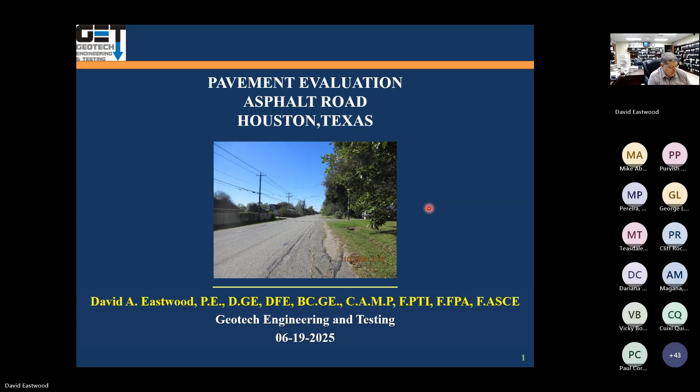Interesting project that we worked on. We got about 170 people RSVP'd on this thing. We have a lot of engineers, city engineer, county engineers, civil engineers, transportation engineers that are listening in, developers.

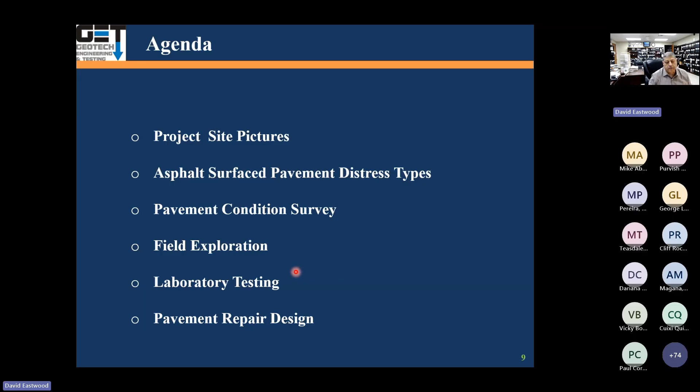Here's the two-lane asphalt road. Actually, subject to a lot of development going out there. So there's a lot of residential development. So there's some distress in some of these pavements, a lot of cracking and potholes.

A lot of edge cracking, and you see a lot of the asphalt pavements around the Houston area, they have this edge cracking because of presence of the open ditch and trees. Both the trees and open ditch take a lot of moisture, evaporation, and of course the trees suck the moisture, and as they do that, a distance from the edge of the pavement of about 9 feet, that's the area that usually the open ditch causes problems, and you're going to see these cracks, and they don't go away.

And so you can go out there and repave it, but it shows back up again. You can put overlay on it; it will still show up. And so to treat it, you're going to have to do curb and gutter, or go concrete paving, or you can do what's called chemical injection all the way down to a depth of 10 feet. Or remove the expansive soils, replace with non-expansive soils, but that still is going to cause problems because of the moisture removal due to the presence of the open ditch.

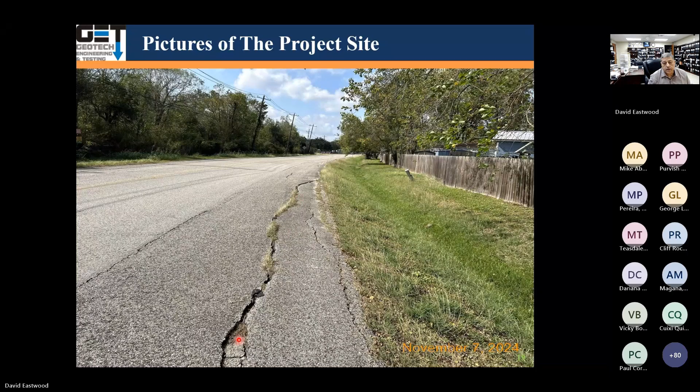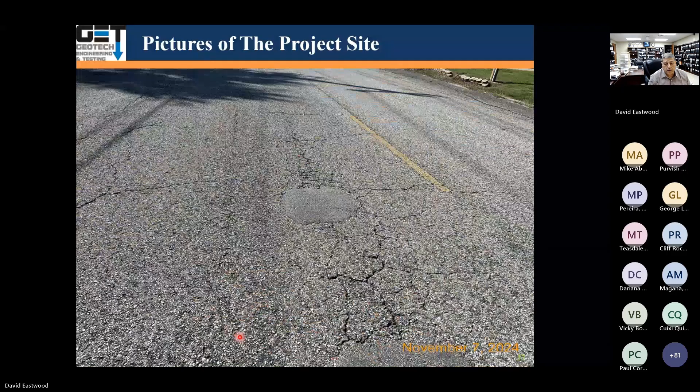Again, more cracks. Again, a lot of edge cracking. So you can see all these different types of distress on the pavement structure. The potholes that had been backfilled. So it was not in the best condition, because of the high traffic loading.

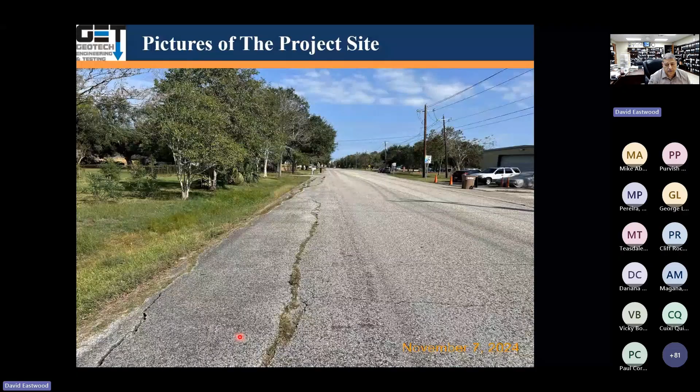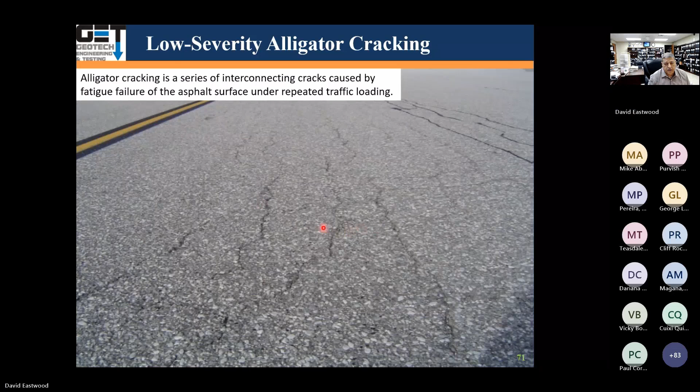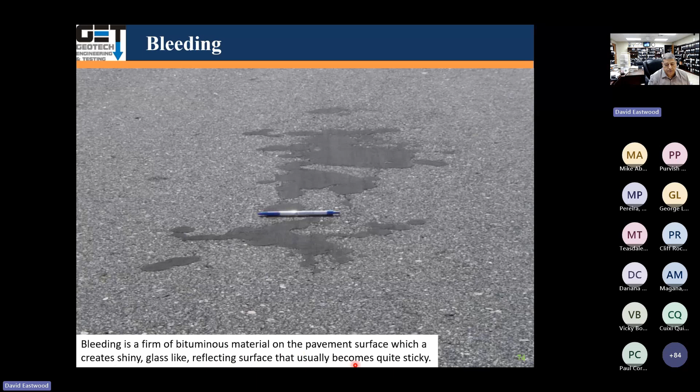Bleeding. Bleeding is basically a film of asphalt material on the pavement surface, which creates a shiny, glassy, reflecting surface that usually becomes quite sticky. And it's caused by excessive asphalt cement or tars in the mix of the asphalt.

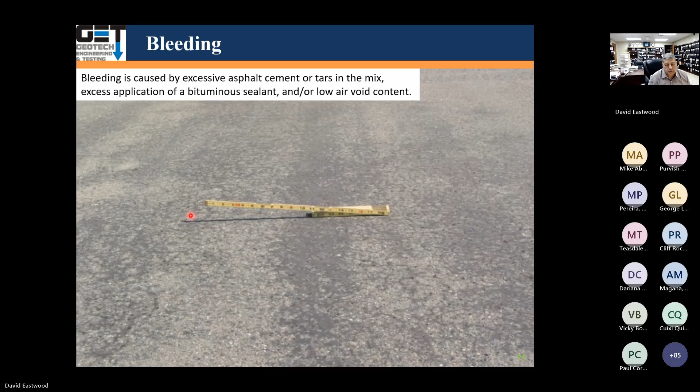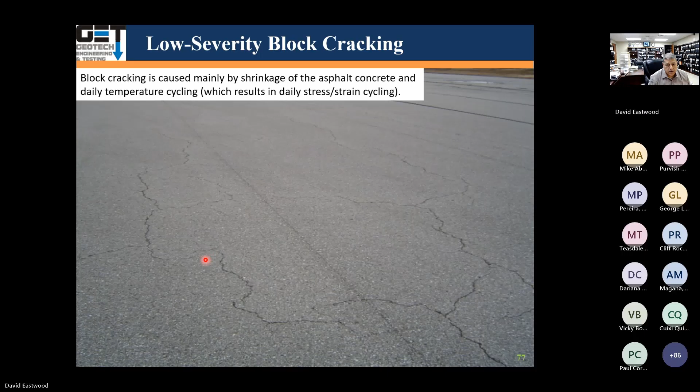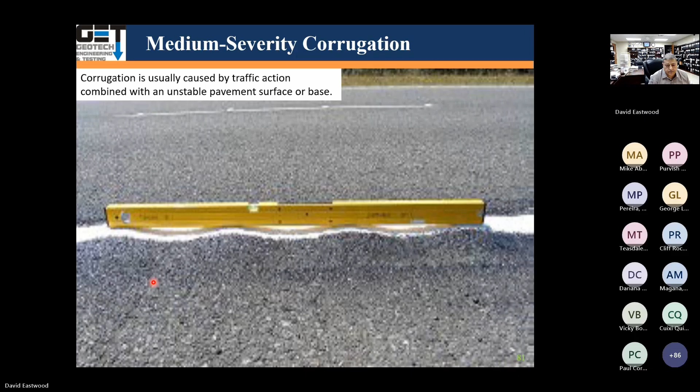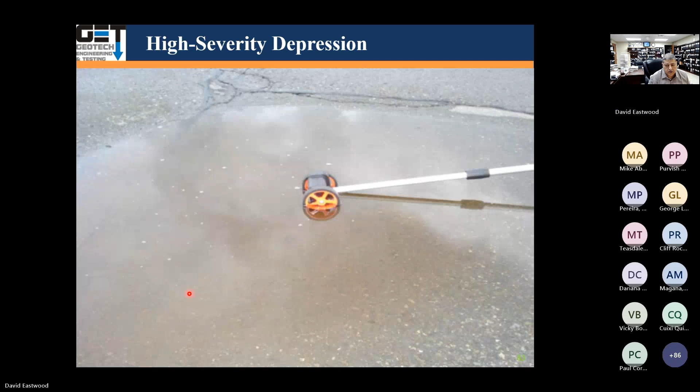We see a lot of depression in the pavements, localized pavement surface with elevations lower than the area around it, called depressions. See the depression here? Here's a big one.

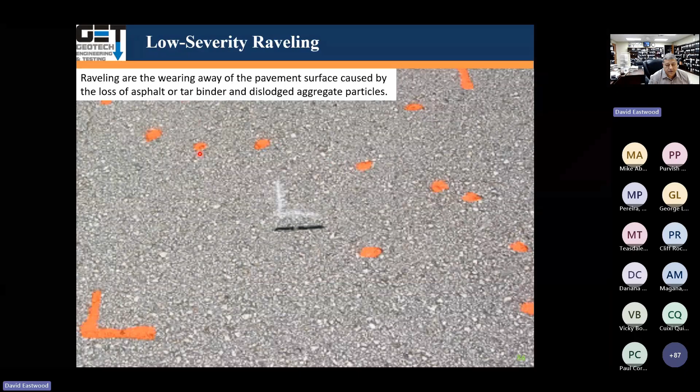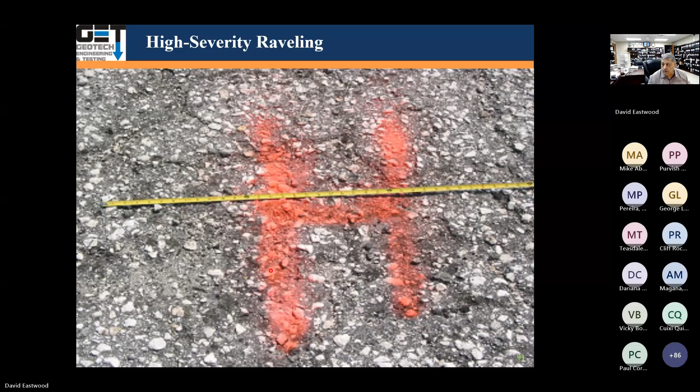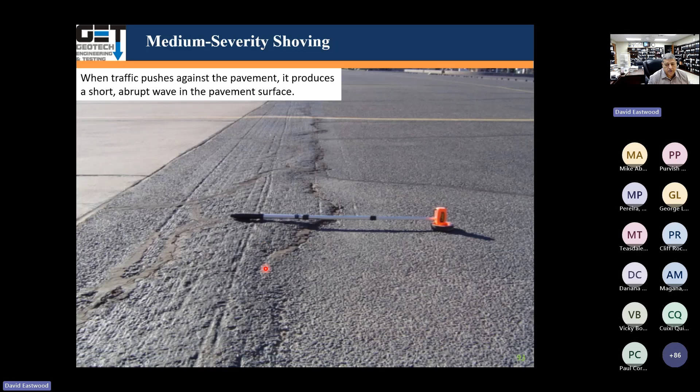Here we've got shoving. It's basically a permanent longitudinal displacement of a localized area of pavement surface caused by traffic loading. This is the shoving here, right there. When the traffic pushes against the pavement, it produces a short, abrupt wave of the pavement surface. It's called shoving. Shoving normally occurs on unstable liquid asphalt pavements.

Pavement condition survey. One of the things we did on this project was go out and do a pavement condition survey, developed by U.S. Army Technical Manual 5-623. It's a manual that goes through the procedure. Essentially, you look at all the cracks, depressions, and pavement distress, and based on that you rate that pavement. If your number is 0 to 10, your pavement has failed.

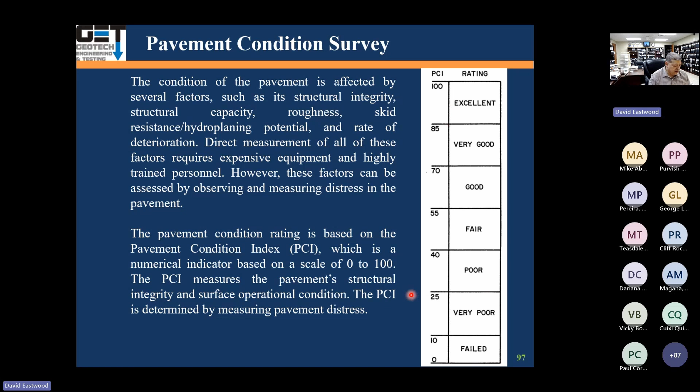Between 10 and 25 is very poor. Between 25 and 40 is poor. Between 40 and 55 is fair. Between 55 and 70 is good. 70 to 85 is very good. Above 85 is excellent. They call it the pavement condition index. I see it all over the place.

Basically, you look at the pavement structure on the road and divide it into sections. In this case, we broke that pavement into 7 sections, and we evaluated the PCI, pavement condition index, at each of the 7 sections.

When you go through it, there's a form that the U.S. Army has, and based on the distress type you go through it. For example, in this case, this is an example of a section on this project, about 1,000 feet long and 32 feet wide, about 32,000 square feet. Here is 3 types of the distress, block cracking that we have.

We had in this 1,000 feet an 8 foot by 17 foot area of low intensity severity block cracking. Then here is joint reflection cracking. In this area we had medium severity joint reflection cracking over 1,000 feet.

In this column we have type 1 alligator cracking. In this 1,000 by 32 foot section, we had 4 by 43, 6 by 40, 6 by 33, and 4 by 13, all low severity alligator cracking.

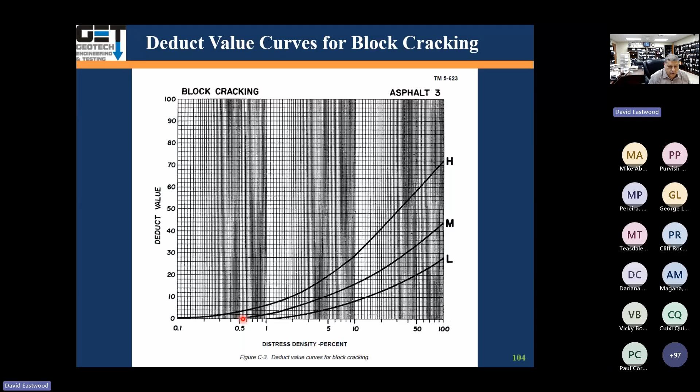You got all these different densities for different types. Number 3 is block cracking with density 0.43. So you go to block cracking at 0.43, which was medium, but it was almost 0, so the deduct value is 0.

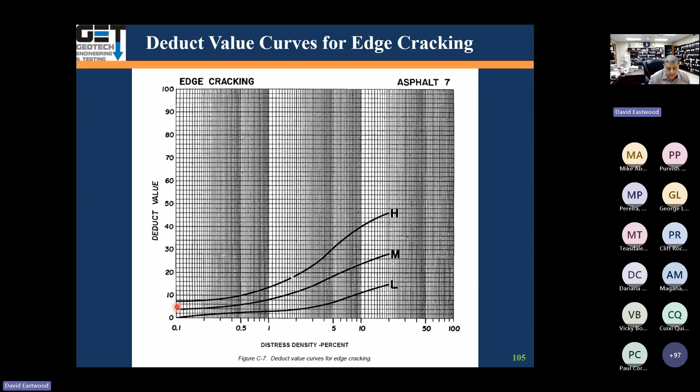You go to distress type number 7, edge cracking. One of them was medium at 0.22. So you go to edge cracking 0.22, which was medium, and you should get somewhere around 5 or so for medium. Going back here for medium, you get 4.

You go through each one of these distress value areas, add them all up, and get a total deduct value of 67. After that, there's what's called a corrected deduct value, CDV. You have to make a correction on these numbers. The way you do it is, after going through these charts, you look at the total deduct value, and the number of entries with deduct values over 5 points, then you get the corrected deduct value.

This is the actual chart. Going back again, our total deduct value was 67, and the number of values higher than 5 was 3. So you have 67 and 3 values greater than 5. Q is the number of deducts greater than 5 points. So you go over here and you get roughly 45 for the corrected deduct value.

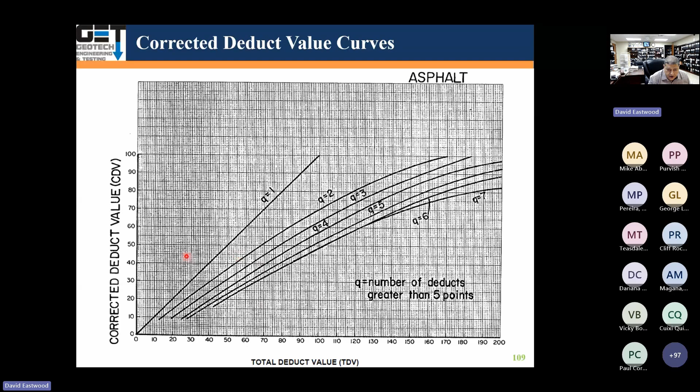Corrected deduct value, so that's roughly 45. Actually it's 42, so we got a corrected value of 42. You subtract that from 100 and you get 58. That's your pavement condition index, which is considered good. So for this 1,000 feet by 32 feet section, the overall rating indicates the pavement is in good condition.

So we basically took that pavement and put it into 7 segments. Here's another segment, 1,000 feet by 22 feet. We went through all the cracking and density calculations and got a corrected deduct value of 51. Subtracting that from 100 gives 49, meaning this segment has a rating of fair.

The next one is a 31 foot by 1,000 foot segment. We got a PCI of 56, which means this section has a rating of good. Here's another one, a segment 34 feet by 1,000 feet. Your PCI is 55, which means fair.

Here's another segment, 5,000 feet by 34 feet, and we got a PCI of 48, which was fair quality. Here's another one, 28 foot wide by 500 foot long, and we got a rating of 68, meaning the pavement is in good condition. The last segment, 24 foot by 290 foot long, had a rating of 80, which is very good condition for that pavement.

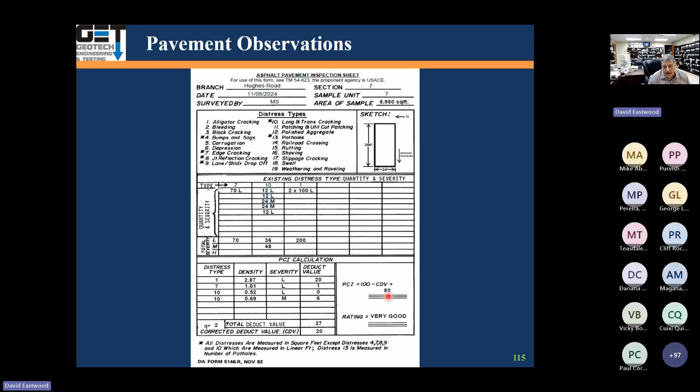So using the pavement rating system, we got results ranging between 48 and 80. So our pavement basically performed from fair to very good. But that's for the existing condition of the pavements. It doesn't account for future traffic loading. So your PCI may be good, but if the traffic load on your pavement is going to increase over time, the PCI assessment doesn't capture that.

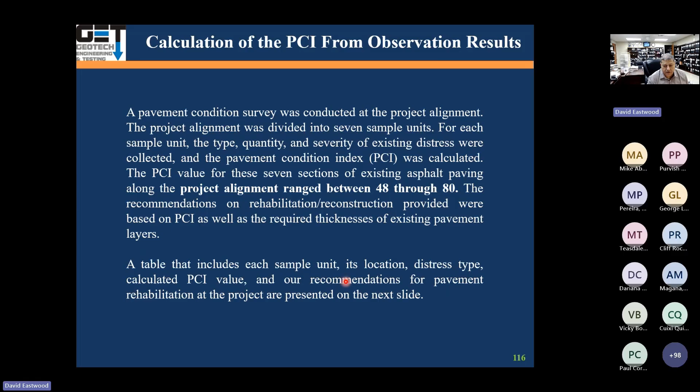In summary: Segment 1 had a bunch of alligator cracking, block cracking, and edge cracking, with a rating of 58, which was good. Segment 2 had alligator cracking, edge cracking, joint reflective cracking, and longitudinal and transverse cracking, which was fair. Segment 3 was 56, good. Segment 4 was 55, good. Segment 5 was 48, which is fair. Segment 6 was 68, good. Segment 7 had less alligator cracking, edge cracking, and longitudinal/transverse cracking, and the PCI was 80, which was very good condition.

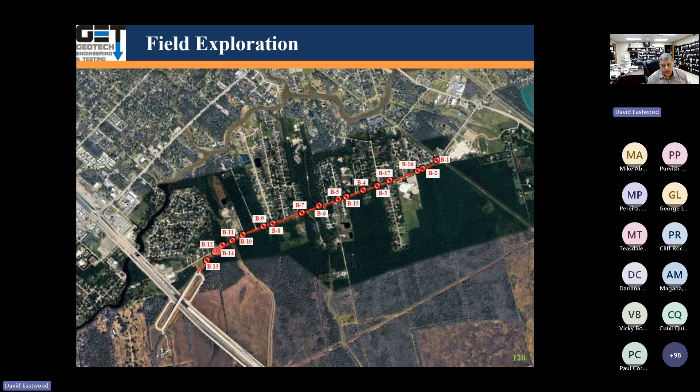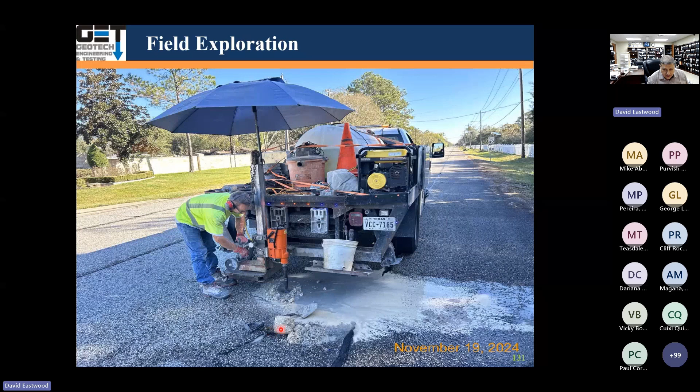Here's another coring. Again, we're coring in here. We see the asphalt pavement and the base, crushed limestone. Again, looking at the cores, you've got asphalt pavement, base, and stabilized subgrade. We cored the stabilized subgrade as well, so you can see the asphalt, the base course, and the stabilized subgrade.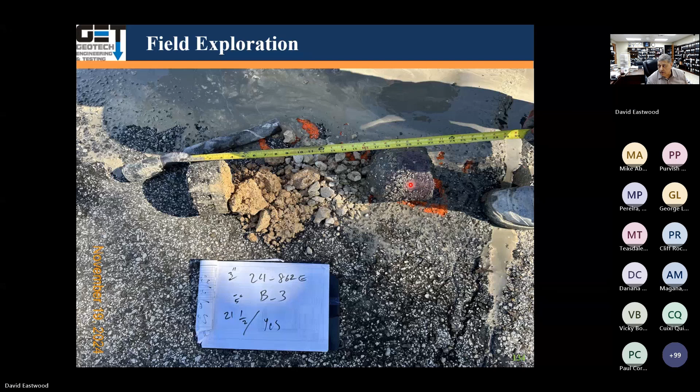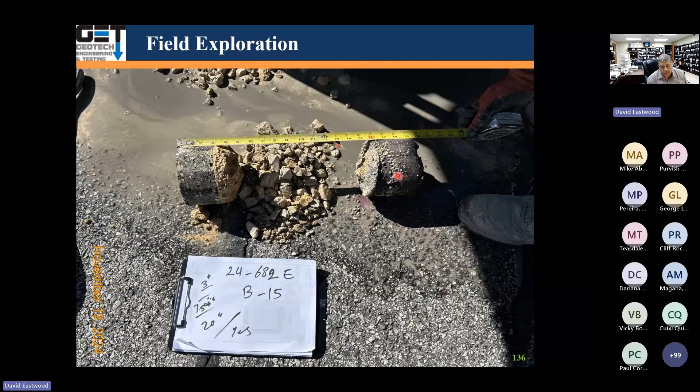Again, pavement, asphalt, base, stabilized subgrade. It's a little pink, meaning there's some lime or cement in it. Asphalt, base, stabilized subgrade - these are the holes that show the asphalt. Here's the base, here's the asphalt, and here's the base underneath in the hole coring.

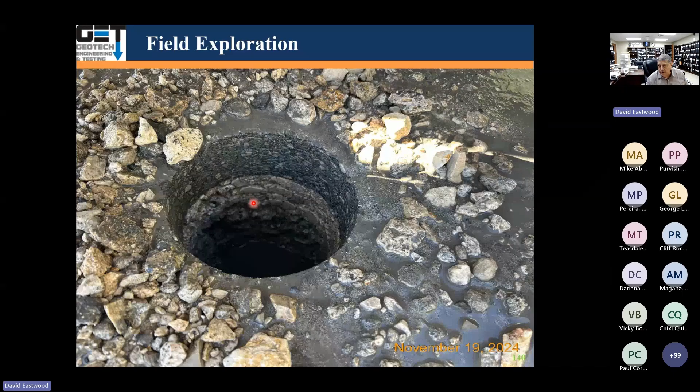After that, when we cored it, we went out there, drilled, and tried to get some soil samples underneath it. So we used our drill rig and did borings out there to get samples of the soils. We got soils extruded and found a lot of fat clays there. We measured the water level to see if there was any water present.

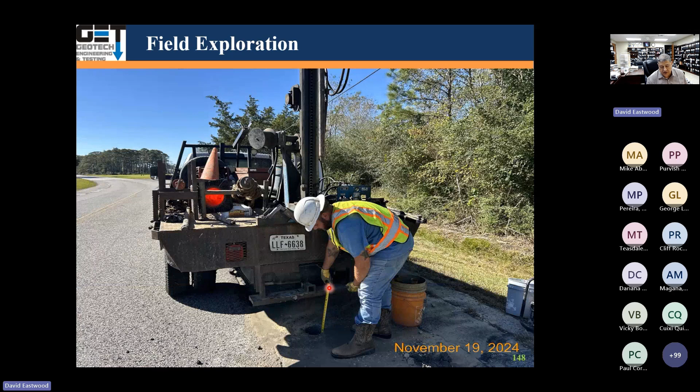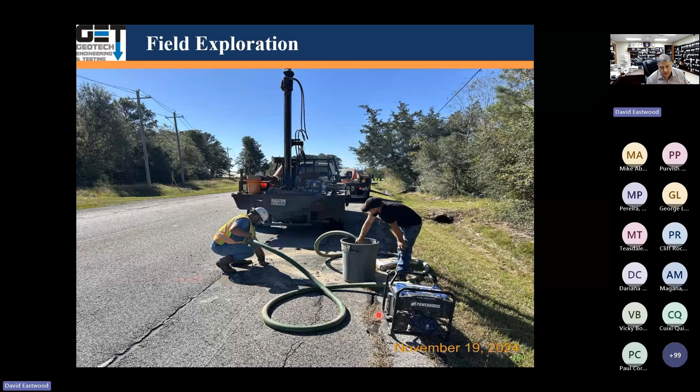When we finish the borings, we grout the holes. We fill them up with cement and grout, cement and bentonite, to fill up the hole. We mix the whole thing together in the bucket and push it under pressure from the bottom up to fill up the hole. We probed it to make sure the hole was grouted properly, so it wouldn't generate a void or someone could step into it.

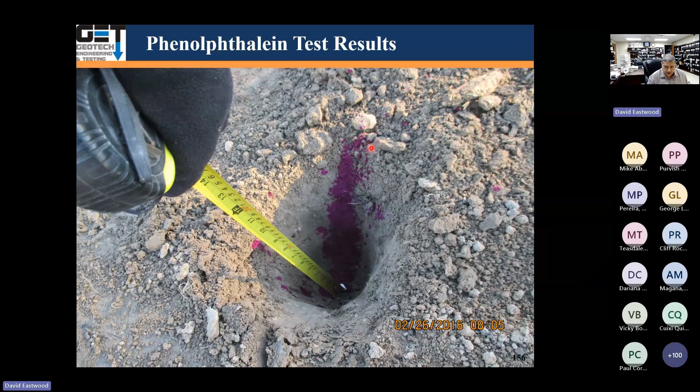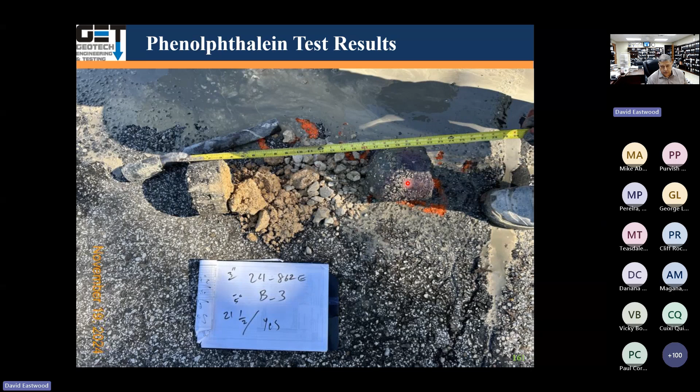Again, you can see in here asphalt, base, stabilized layer, verifying that there was some lime-stabilized or cement-stabilized subgrade. In this case, since the soils were fat clays, we assumed this to be lime stabilized. And you can see here the asphalt, the base, this is the stabilized layer - it's got a little bit of purple in it.

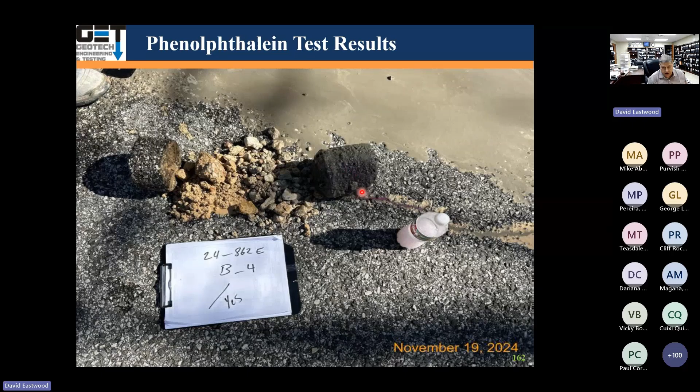Here's another one. You can see the asphalt, base, stabilized subgrade with purple. Asphalt, stabilized, purple stabilized layer - it had lime in it.

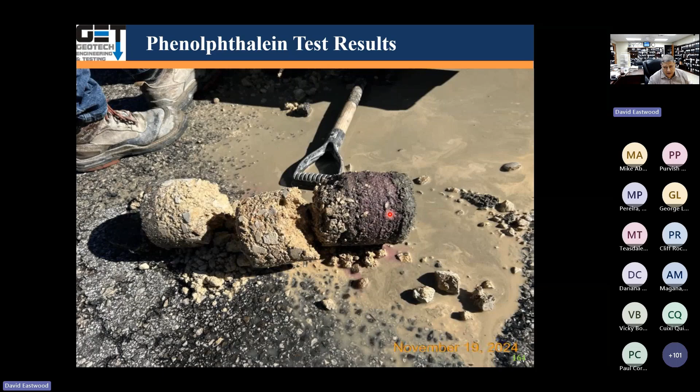Here's another one. Asphalt, crushed limestone base, stabilized subgrade turned purple. There's another one here - asphalt, stabilized base, stabilized layer. Asphalt, base, stabilized layer turned purple. This is the last one - asphalt, base, crushed limestone, stabilized layer turned purple.

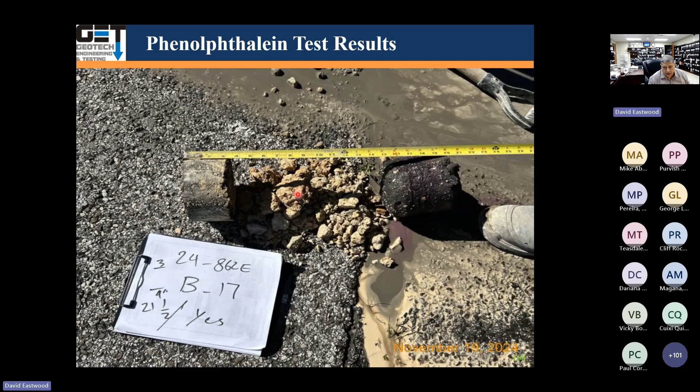Basically asphalt stabilized base there. So when we summarize all this, we had 17 borings. Some of them had a stabilized layer, like this one didn't have. B7, we had no stabilized layer - there was actually no stabilized area at B7. B10 had no stabilization. B12 had zero, B13 had zero stabilization.

Some of them had like 2 inches of stabilized subgrade, some had 10 inches, some had 14 inches, and some had no stabilization at all. We did lab testing - classification tests, strength tests, phenolphthalein tests.

You plot the borings: B1, you've got the asphalt, below that crushed limestone, below that the stabilized layer, below that fat clay. B2, you had asphalt, crushed limestone base, and a stabilized layer.

You can see that the stabilized layer is going to vary all over the place, same as with the crushed limestone base. These are B1 through B9, and this is B10 through B17. You can see here that B10, for example, has no stabilized layer.

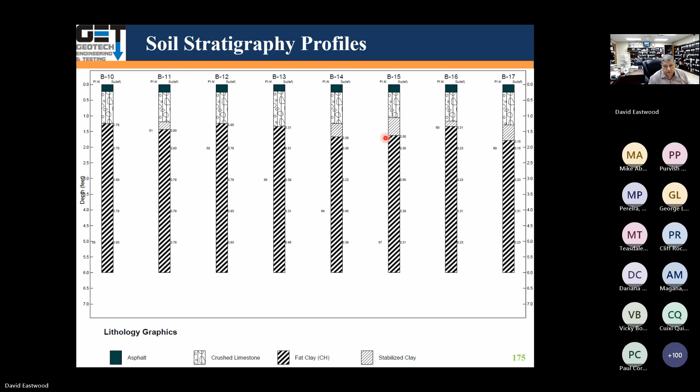B11's got only maybe a couple of inches. B13 has got no stabilized layer. B12 has no stabilized layer. B15 has got some. B16 has got some.

In general, we had 0 to about 0.25 feet of asphalt paving, 0 to 3 inches in thickness. Below that, you've got crushed limestone, 0 to about 13 or 14 inches. Stabilized layer, 0 to about 14 inches. Below that was all fat clay. The soil had PIs between 44 and 72, indicating the soil was highly expansive.

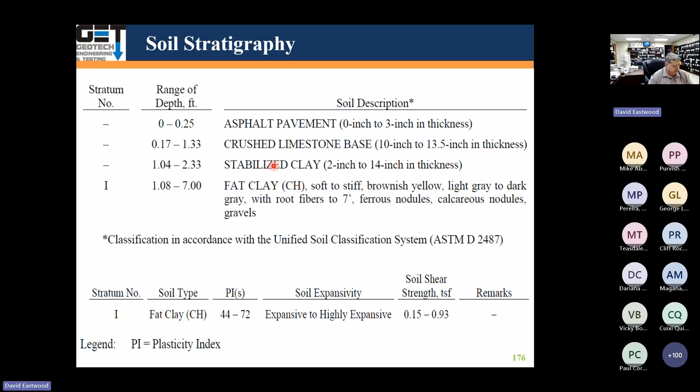B2: 3 inches of asphalt, 11 inches of crushed limestone. Stabilized layer was 14 inches. Fat clay underneath it with a PI of 64.

B3: asphalt of 3 inches, crushed limestone 12.5 inches, stabilized layer 6 inches of clay. That was lime stabilized, and below that, fat clay with a PI of 69.

Going through this here, B7 had 2 inches of asphalt, 11 inches of base, and no stabilized layer, with a PI of 53. So that shows the boring logs. Each one is kind of different, as I went through already. Pavement design.

When we look at this pavement, the PCI, pavement condition index, was fair to very good. We want to know what the pavement structure was. We did the borings and found out the pavement structure was variable.

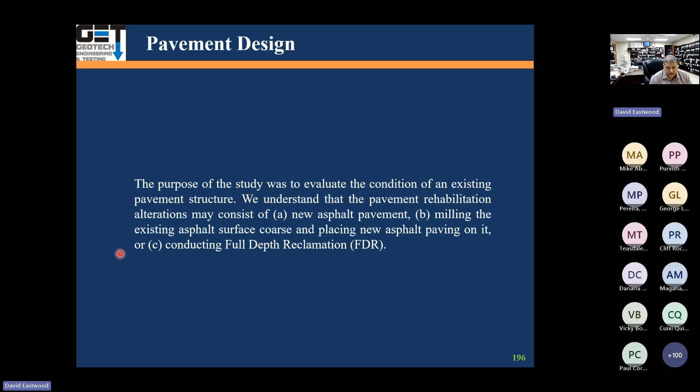One of the things we looked at, of course, is the future traffic loading. Based on that, we determine the type of repair: either reconstruction with new asphalt pavement, milling the existing surface and putting a new asphalt layer on top of it, or full depth reclamation.

The current pavement structure is called minor arterial, and we looked at the AASHTO pavement design and came up with, for the next 10 years, a traffic loading of 2.4 million ESAL, equivalent single axle loads. That's what you get from the AASHTO pavement design. So this is our traffic loading, 2.4 million ESAL for the next 10 years. We want to know how this pavement performs under that traffic loading.

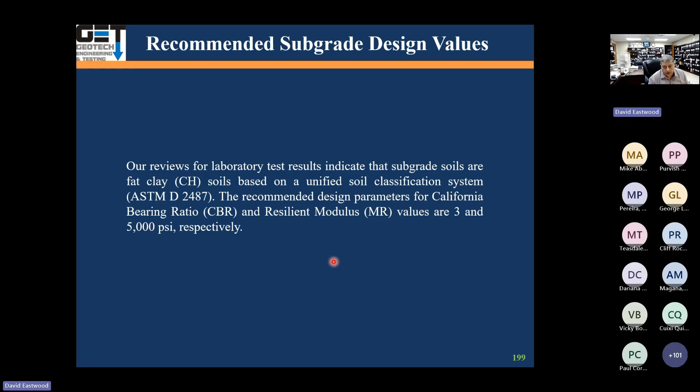The soils underneath the pavement were fat clays. Looking at the AASHTO pavement design, it had a resilient modulus of 5,000 PSI. CBR was 3. Resilient modulus is usually about 1,500 times CBR, that's California bearing ratio.

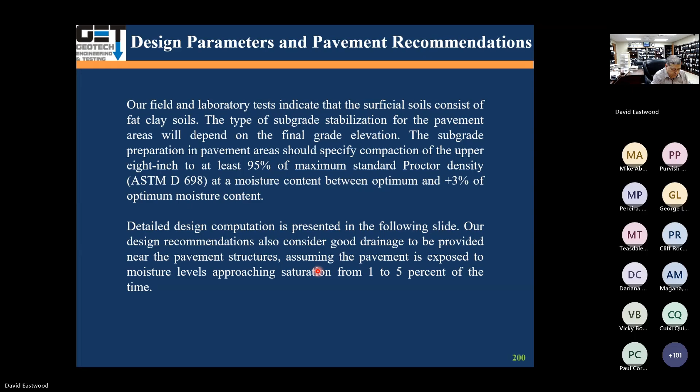Here's some of the design parameters we used: traffic loading 2.4 million, reliability 95%, overall standard deviation 0.35, drainage coefficient 1.25, design serviceability loss 2.2, CBR 3, resilient modulus 5. Structural coefficients: structural numbers here for asphalt, 0.44, crushed limestone 0.14, black base 0.34, and lime stabilized is about 0.11.

Going through the pavement design by AASHTO, with reliability of 95 and the overall standard deviation, you have the turning line here. From that, you go to the traffic loading of 2.4 million, then to the effective roadbed soil resilient modulus of 5,000. That brings you right here, and from that you go to the design serviceability loss of 2.2 for this curve.

That brings you down to the design structural number. In this case, our design structural number was 4.2.

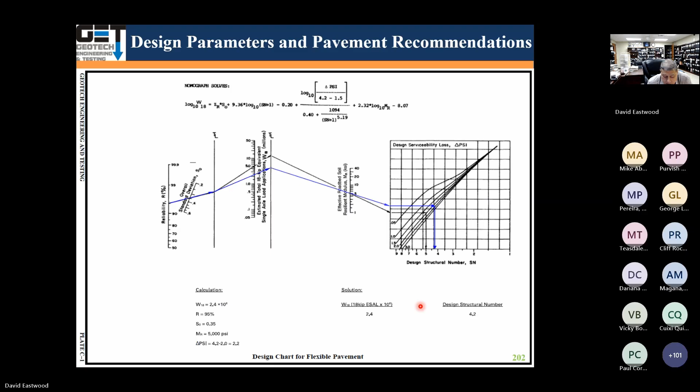So for a design structural number of 4.2, we go to AASHTO pavement design. Your structural number is 4.2, A1D1, A2D2, A3D3. This corresponds to the structural number for the material we're using times the depth. This is the asphalt surface, which is 0.44 times the depth.

This is the structural number for the base times the thickness of the base. Structural number for the stabilized subgrade times the thickness. A1, A2, A3 are layer coefficients, and D1, D2, D3 are the actual thicknesses.

The structural numbers for various materials used: for concrete paving, the structural number is 0.5, which is the highest. For hot mix asphalt it's 0.44. Black base 0.34. Stabilized, cement stabilized limestone base 0.23. In this case, we have crushed stone, which is 0.14 for recycled concrete. For lime stabilized subgrade it's 0.11.

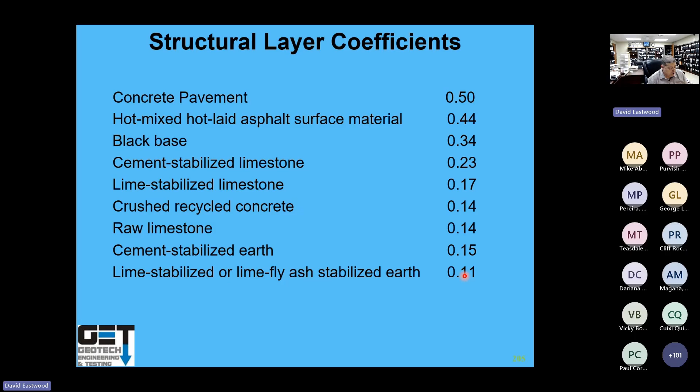So we go through this equation and come up with a proposed pavement design. One option is for 2.4 million traffic loading: 3 inches of asphalt on top, 8 inches of crushed limestone base, and stabilization of the subgrade at 18 inches. Or you can reduce the stabilization with 2 inches of asphalt, 8 inches of black base, and 8 inches of stabilized subgrade. These are a couple of options.

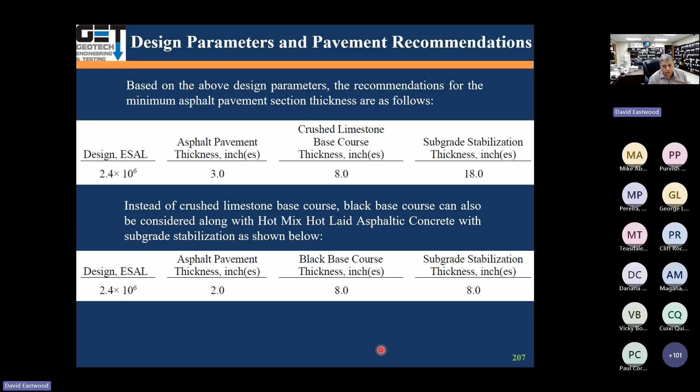You can have a combination as long as your structural number is 4.2. All the cohesive soils on the subgrade, of course, got to be compacted with 9% lime in this case.

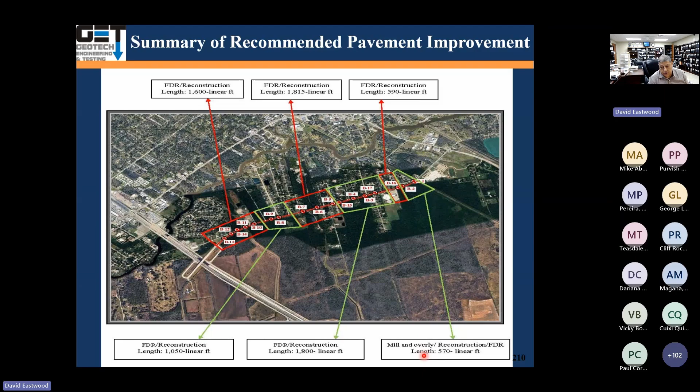So we basically divided the pavement structure along the alignment into 7 segments. This segment is for 1,600 feet, you've got FDR reconstruction. Segment 2, FDR, that's full depth reclamation or reconstruction. Segment 3, FDR reconstruction, all the way to section 7. This section you can do mill and overlay because it was in good condition, or do reconstruction. Full depth reclamation - we really like full depth reclamation.

Projects like this, you've got asphalt paving. It's a method basically for asphalt paving and reconstruction. It uses the existing asphalt in the base and the subgrade, if it's stabilized, to produce a new stabilized base, and you put an overlay on top of that. The advantages are you can use the on-site material and you don't have to haul in a bunch of new stuff. Not much material's got to be hauled in. You've got to put a new asphalt surface course on top of it.

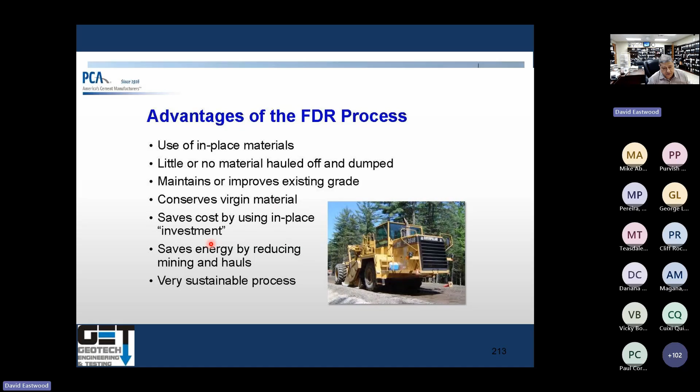It maintains and improves an existing grade, conserves virgin material that's already in place, saves costs by using in-place investment, saves energy, and it's a very sustainable process. The kind of stabilization you can use, once you mix the material, is emulsified asphalt or foamed asphalt, or you can use cement. In this case, we recommended using cement.

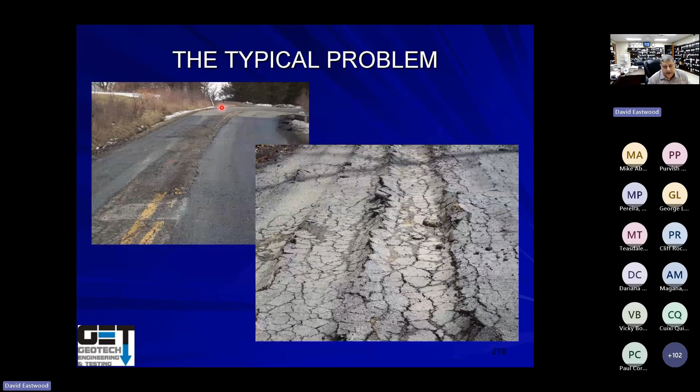These are some of the pavements that may require full depth reclamation, or if your traffic loading is going to be high and the existing pavement cannot handle it, you've got to use full depth reclamation. The application - basically 83% of the pavements in the US are asphalt, 5.7% is concrete, and 10.6% is a combination of asphalt and concrete.

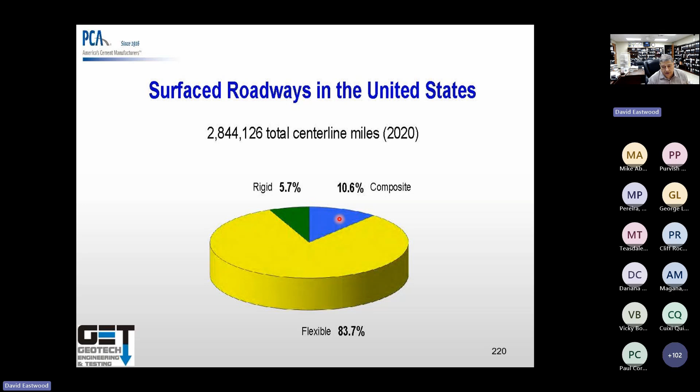FDR involves mixing up the existing asphalt aggregates, subbase, and underlying soils with chemicals - in this case cement, usually like 7% cement. It goes in there and chops the existing pavement, mixing it into small pieces, and then you mix that with cement, and that becomes your base. Typically, chemicals consist of cement or quick lime. I don't think lime works real well.

Basically, you use full depth reclamation if the pavement is seriously damaged. Pavement distress indicates that the problem likely exists in the base or subgrade. Distress will require full depth patching over 20% of the area, or the pavement structure is deemed inadequate for the current or future traffic. So that's our case here - the pavement structure is not adequate for the future traffic.

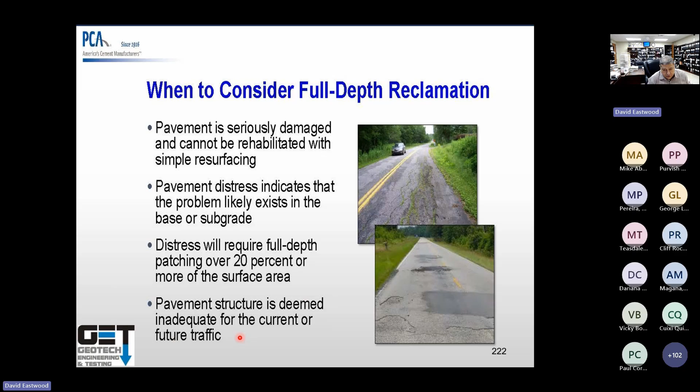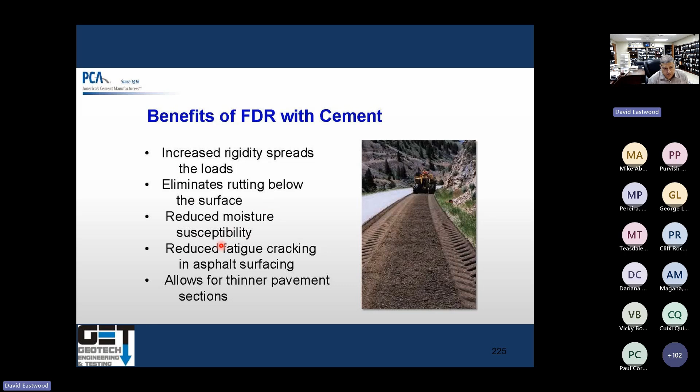These are some of the pictures that show which types of pavements use full depth reclamation. Benefits, of course, include increased rigidity that spreads the loads, eliminates rutting, reduces susceptibility, reduces fatigue cracking, and allows thinner pavement sections.

The way you design it is you look at your pavement design procedure. You can use mechanistic design, empirical design, or mechanistic-empirical design. There's a pavementdesigner.org software you can go to and design the pavement. In this case, we use the empirical AASHTO 1993 pavement design.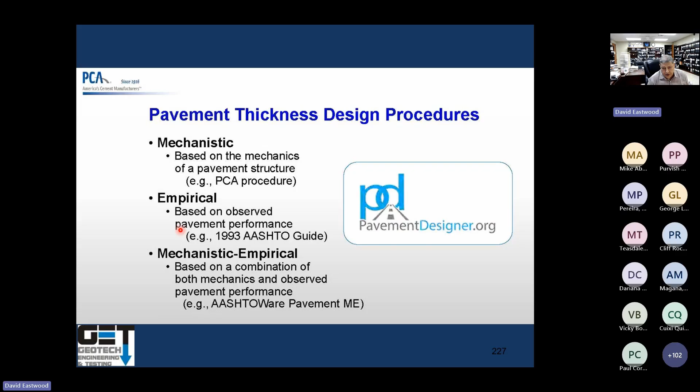In terms of the materials, we've got to do sieve analysis to make sure it's got proper gradation, Atterberg limits, moisture density, and compressive strength. In parts of the state where you have high sulfate, you've got to check for sulfate.

I was talking to the Galveston County guys the other day. They have calcium sulfate as a base under some of their roadways. So if you do full depth reclamation in Galveston County, where you've got that base, you cannot stabilize that subgrade because you're going to get sulfate heave. Sulfate mixes with the soil, and with lime, if you lime it, it starts heaving and destroys your paving. So you've got to be very careful if you're doing a project where you've got stuff with sulfate in it as a base, like calcium sulfate that's under some of the Galveston County road projects.

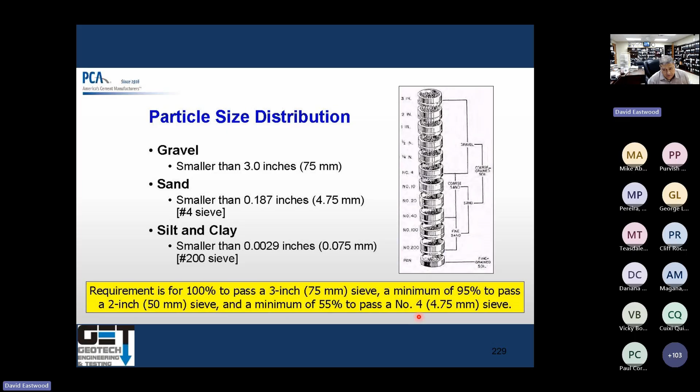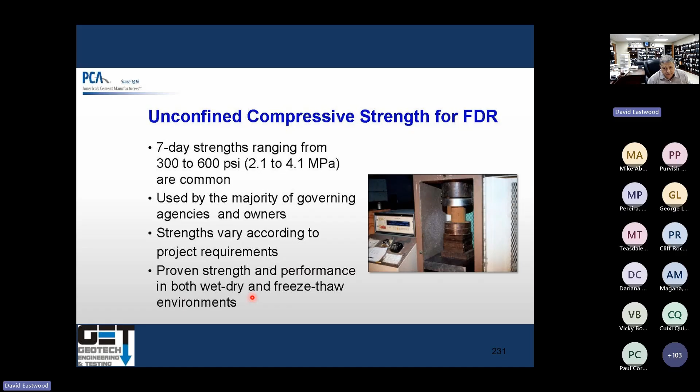Also, the mixed material with cement should have a 7-day strength of about 300 to 600 psi. The majority of states, like TxDOT and others, use some kind of strength values with the project requirements, proven strength and performance in both wet-dry and freeze-thaw environments.

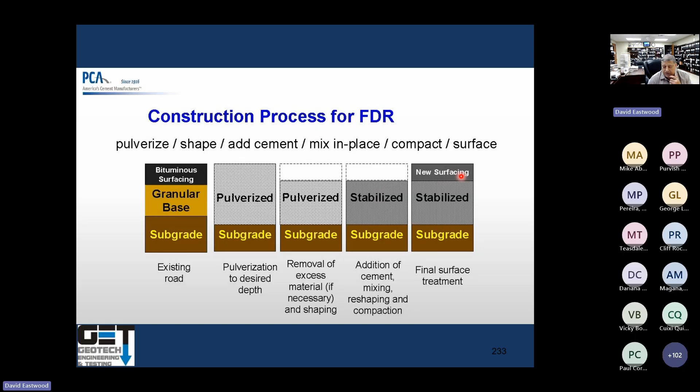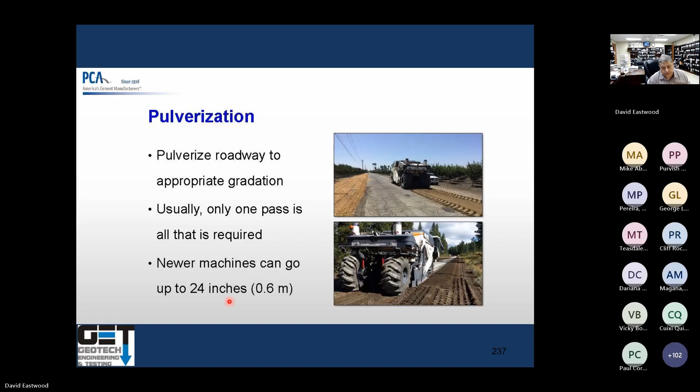It pulverizes to the appropriate gradation. Usually only 1 pass is required. They can go up to about 24 inches deep. You remove the excess material, shape the reclaimed material to meet the design. Make sure you got all the elevations. Then you bring the cement in and mix with it, usually about 7%. You mix it, average of 7% cement by dry weight.

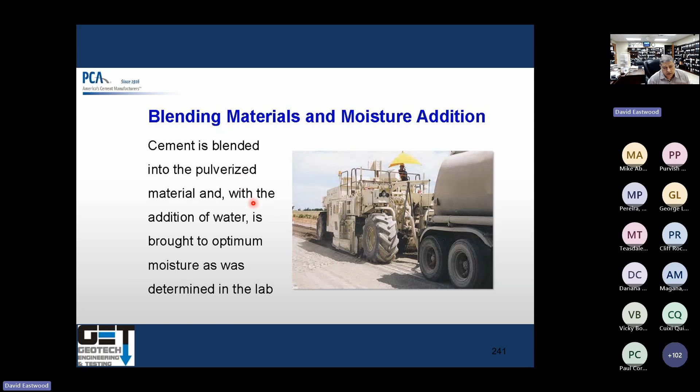Blend it in and compact it right away. Water is added, brought to the optimal moisture. Got to compact 95 to 98% of Proctor density. Then you let it sit there, let it cure for a little while, and either add water to it to let it cure, or you put a tack coat.

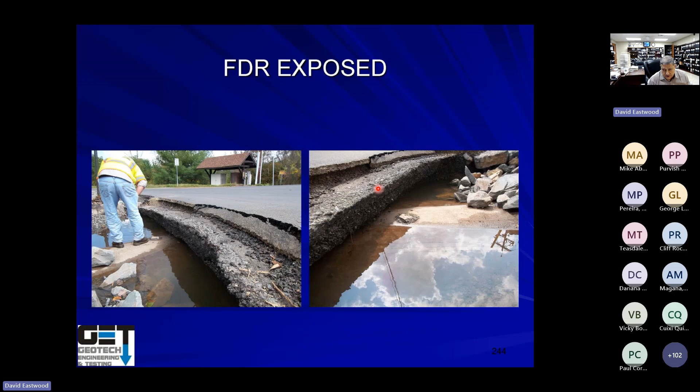Here's the stabilized layer, if you can go look at it. After it's stabilized, this is the existing asphalt and the base and subgrade mixed. That's what it looks like. That's the stabilized layer, and the asphalt on top of it. Basically, the testing that you will do is make sure you got proper gradation, as we talked about. 100% should pass the 3-inch sieve, 95% the 2-inch sieve, and 55% should pass the number 4 sieve. We check that moisture is within 2% of the optimum, and then you run density 98%, ASTM D558.

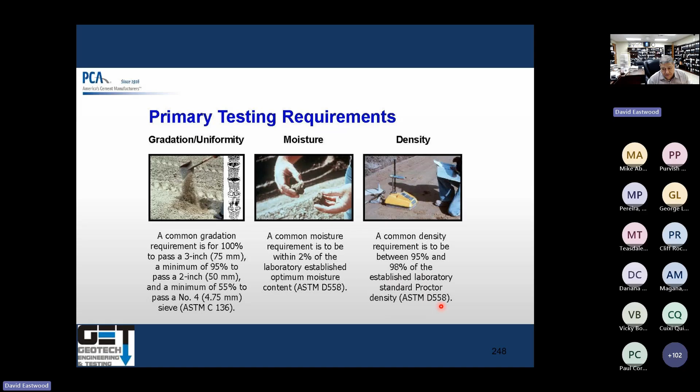Then you turn it to traffic. You can complete it and turn it to traffic immediately and put the asphalt course on top of it later, or you can do it right away. You put a tack coat, and then you put an asphalt surface course on top of it. The cost a couple years ago ran about $9 to $13 per square yard for mixing, compaction, and finishing.

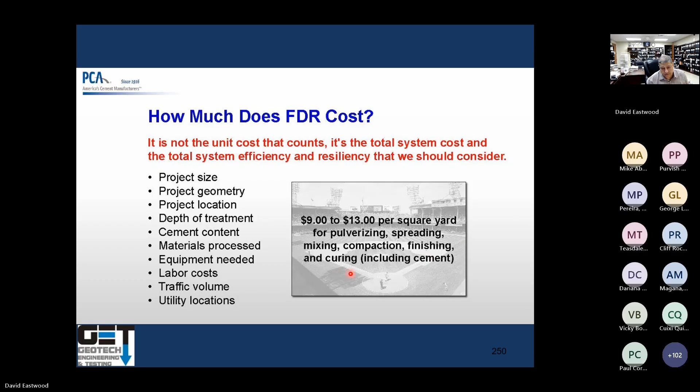Basically, after you stabilize that subgrade for full depth reclamation, you go in there and put a tack coat in, you bring in your asphalt, and lay it on there. You compact it.

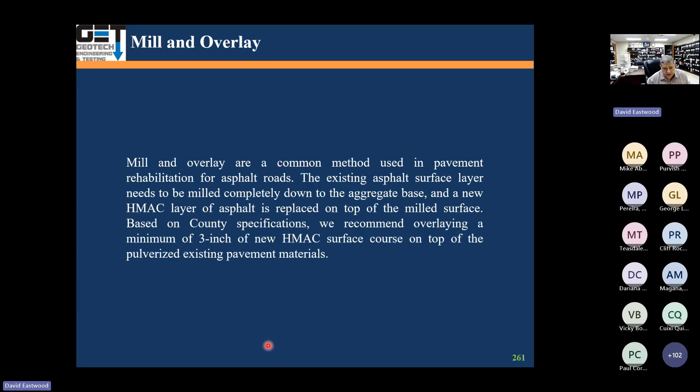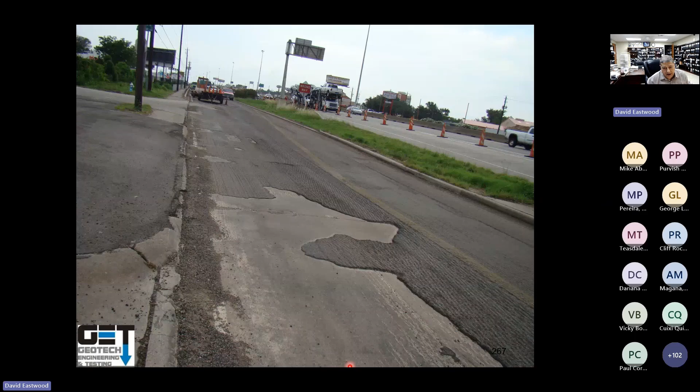In terms of another repair, of course, with mill and overlay, if you have good condition pavements, you go out there and basically mill the existing asphalt paving with a milling machine. You take out all the asphalt. This is after milling. You go out there and put a tack coat on it. That basically is a tack coat. It's a binder that attaches the base to your asphalt paving. It's a bonding agent. It's an asphalt emulsion, MC30 or MC70.

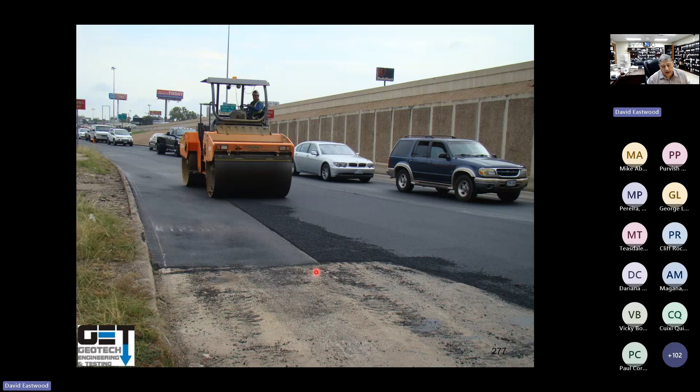Bring in your asphalt. Start laying it on there. And then compact it with a steel drum roller. That's what it looks like. Run density tests. Make sure all the densities pass. Usually run 3 densities per every 100 feet to verify rolling pattern. You core it every 300 to 500 feet.

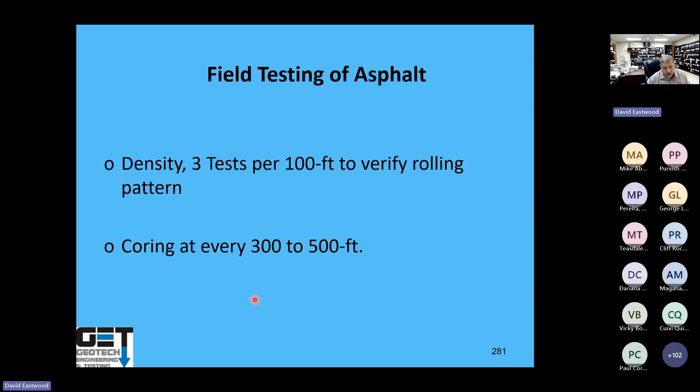Make sure you got proper thickness of asphalt. We find out we don't have enough asphalt thickness in a lot of projects, so make sure you core it. And you run these tests in the lab: maximum theoretical density, Superpave, gradation, asphalt content. So that's it.